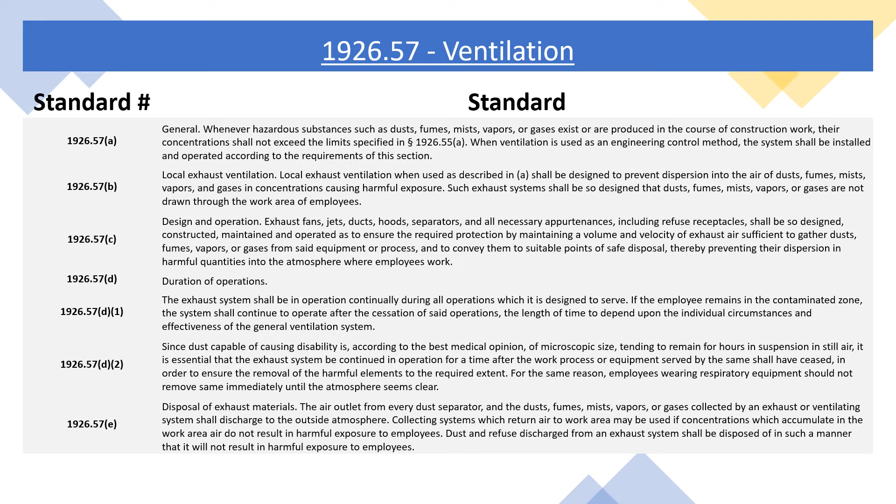Collecting systems which return air to the work area may be used if concentrations which accumulate in the work area air do not result in harmful exposure to employees. Dust and refuse discharged from an exhaust system shall be disposed of in such a manner that it will not result in harmful exposure to employees.

1926.57(f) Abrasive blasting. 1926.57(f)(1) Definitions applicable to this paragraph. Abrasive: a solid substance used in an abrasive blasting operation.

1926.57(f)(1)(2) Abrasive blasting respirator: a respirator constructed so that it covers the wearer's head, neck, and shoulders to protect the wearer from rebounding abrasive.

1926.57(f)(1)(3) Blast cleaning barrel: a complete enclosure which rotates on an axis, or which has an internal moving tread to tumble the parts, in order to expose various surfaces of the parts to the action of an automatic blast spray.

1926.57(f)(1)(4) Blast cleaning room: a complete enclosure in which blasting operations are performed and where the operator works inside of the room to operate the blasting nozzle and direct the flow of the abrasive material.

1926.57(f)(1)(5) Blasting cabinet: an enclosure where the operator stands outside and operates the blasting nozzle through an opening or openings in the enclosure.

1926.57(f)(1)(6) Clean air: air of such purity that it will not cause harm or discomfort to an individual if it is inhaled for extended periods of time.

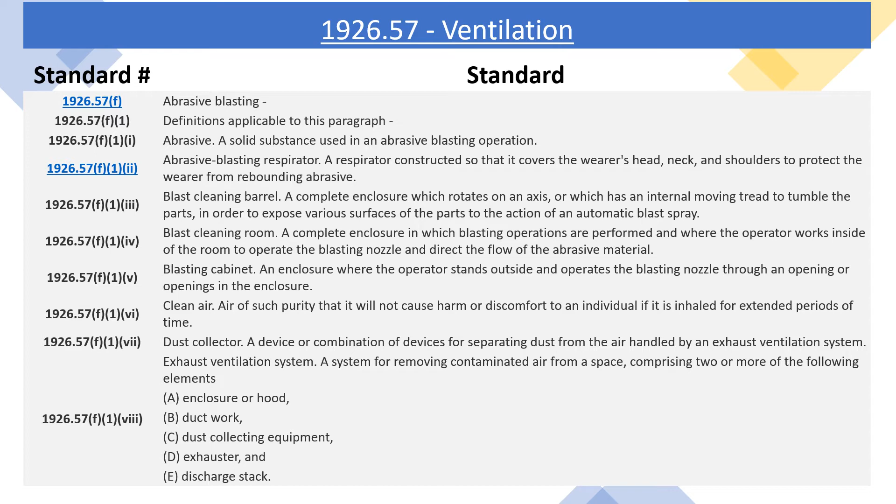1926.57(f)(1)(8) Exhaust ventilation system: a system for removing contaminated air from a space, comprising two or more of the following elements: A. Enclosure or hood, B. Ductwork, C. Dust collecting equipment, D. Exhauster, and E. Discharge stack.

1926.57(f)(1)(9) Particulate filter respirator: an air purifying respirator, commonly referred to as a dust or a fume respirator, which removes most of the dust or fume from the air passing through the device.

1926.57(f)(1)(10) Respirable dust: airborne dust in sizes capable of passing through the upper respiratory system to reach the lower lung passages.

1926.57(f)(1)(11) Rotary blast cleaning table: an enclosure where the pieces to be cleaned are positioned on a rotating table and are passed automatically through a series of blast sprays.

1926.57(f)(1)(12) Abrasive blasting: the forcible application of an abrasive to a surface by pneumatic pressure, hydraulic pressure, or centrifugal force.

1926.57(f)(2) Dust hazards from abrasive blasting.

1926.57 F2.1: Abrasives and the surface coatings on the materials blasted are shattered and pulverized during blasting operations, and the dust formed will contain particles of respirable size. The composition and toxicity of the dust from these sources shall be considered in making an evaluation of the potential health hazards.

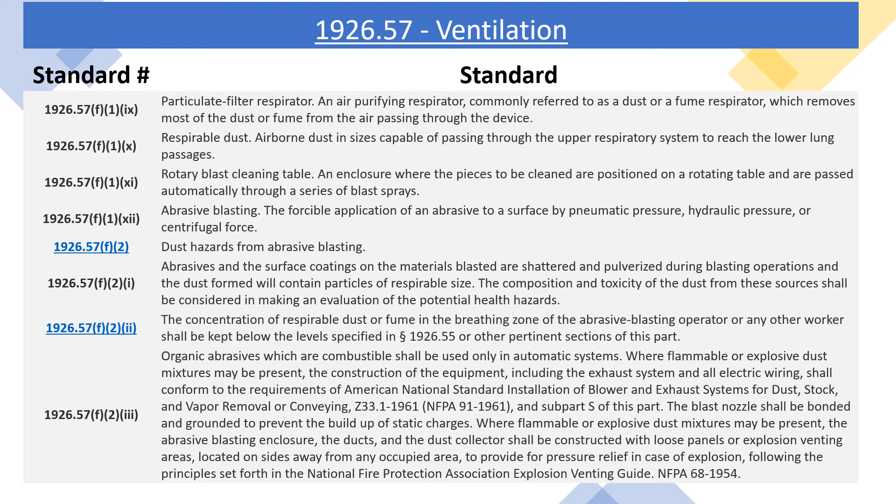The blast nozzle shall be bonded and grounded to prevent the buildup of static charges. Where flammable or explosive dust mixtures may be present, the abrasive blasting enclosure, the ducts, and the dust collector shall be constructed with loose panels or explosion venting areas, located on sides away from any occupied area, to provide for pressure relief in case of explosion, following the principles set forth in the National Fire Protection Association Explosion Venting Guide, NFPA 68-1954.

1926.57 F3: Blast cleaning enclosures. 1926.57 F3.1: Blast cleaning enclosures shall be exhaust ventilated in such a way that a continuous inward flow of air will be maintained at all openings in the enclosure during the blasting operation.

1926.57 F3.1.A: All air inlets and access openings shall be baffled or so arranged that by the combination of inward airflow and baffling, the escape of abrasive or dust particles into an adjacent work area will be minimized and visible spurts of dust will not be observed.

1926.57 F3.1.B: The rate of exhaust shall be sufficient to provide prompt clearance of the dust-laden air within the enclosure after the cessation of blasting.

1926.57 F3.1.C: Before the enclosure is opened, the blast shall be turned off and the exhaust system shall be run for a sufficient period of time to remove the dusty air within the enclosure.

1926.57 F3.1.D: Safety glass protected by screening shall be used in observation windows, where hard deep-cutting abrasives are used.

1926.57 F3.1.E: Slit abrasive resistant baffles shall be installed in multiple sets at all small access openings where dust might escape, and shall be inspected regularly, and replaced when needed.

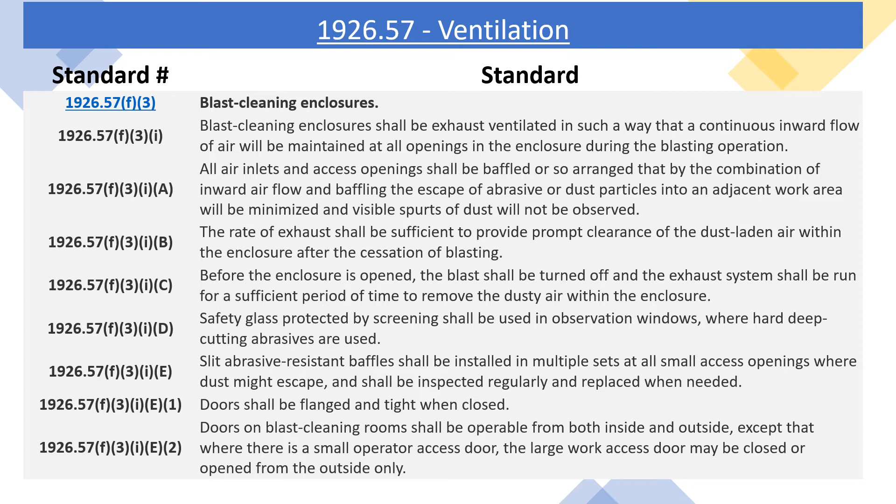1926.57 F3.1.E.2: Doors on blast cleaning rooms shall be operable from both inside and outside, except that where there is a small operator access door, the large work access door may be closed or open from the outside only.

1926.57 F4: Exhaust ventilation systems. 1926.57 F4.1: The construction, installation, inspection, and maintenance of exhaust systems shall conform to the principles and requirements set forth in American National Standard Fundamentals Governing the Design and Operation of Local Exhaust Systems, Z9.2-1960, and ANSI Z33.1-1961.

1926.57 F4.1.A: When dust leaks are noted, repairs shall be made as soon as possible. 1926.57 F4.1.B: The static pressure drop at the exhaust ducts leading from the equipment shall be checked when the installation is completed,

and periodically thereafter to assure continued satisfactory operation. Whenever an appreciable change in the pressure drop indicates a partial blockage, the system shall be cleaned and returned to normal operating condition.

1926.57 F4.2: In installations where the abrasive is recirculated, the exhaust ventilation system for the blasting enclosure shall not be relied upon for the removal of fines from the spent abrasive instead of an abrasive separator. An abrasive separator shall be provided for the purpose.

1926.57 F4.3: The air exhausted from blast cleaning equipment shall be discharged through dust collecting equipment. Dust collectors shall be set up so that the accumulated dust can be emptied and removed without contaminating other working areas.

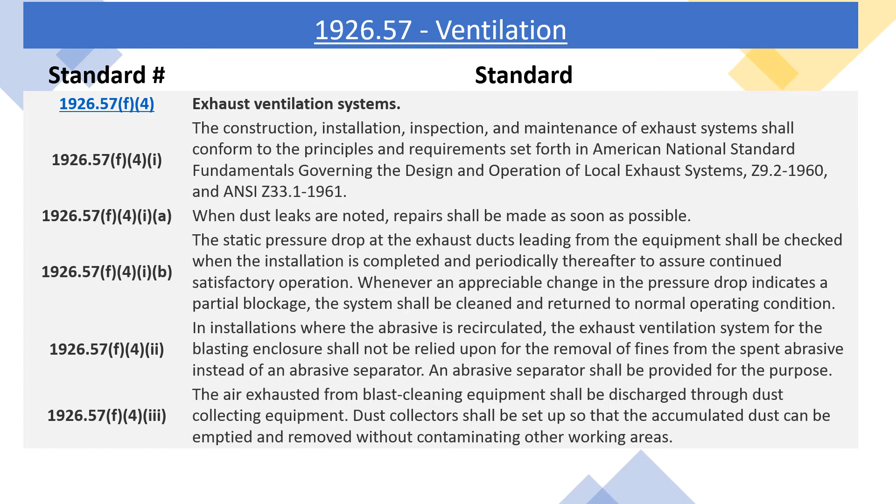1926.57 F5: Personal protective equipment. 1926.57 F5.1: Employers must use only respirators approved by NIOSH under 42 CFR Part 84 for protecting employees from dusts produced during abrasive blasting operations.

1926.57 F5.2: Abrasive blasting respirators shall be worn by all abrasive blasting operators. 1926.57 F5.2.A: When working inside of blast cleaning rooms, or 1926.57 F5.2.B: When using silica sand in manual blasting operations where the nozzle and blast are not physically separated from the operator in an exhaust ventilated enclosure, or

1926.57 F5.2.C: Where concentrations of toxic dust dispersed by the abrasive blasting may exceed the limit set in section 1926.55, or other pertinent sections of this part, and the nozzle and blast are not physically separated from the operator in an exhaust ventilated enclosure.

1926.57 F5.3: Properly fitted particulate filter respirators, commonly referred to as dust filter respirators, may be used for short, intermittent, or occasional dust exposures such as cleanup, dumping of dust collectors, or unloading shipments of sand at a receiving point when it is not feasible to control the dust by enclosure, exhaust ventilation, or other means. The respirators used must be approved by NIOSH under 42 CFR Part 84 for protection against the specific type of dust encountered.

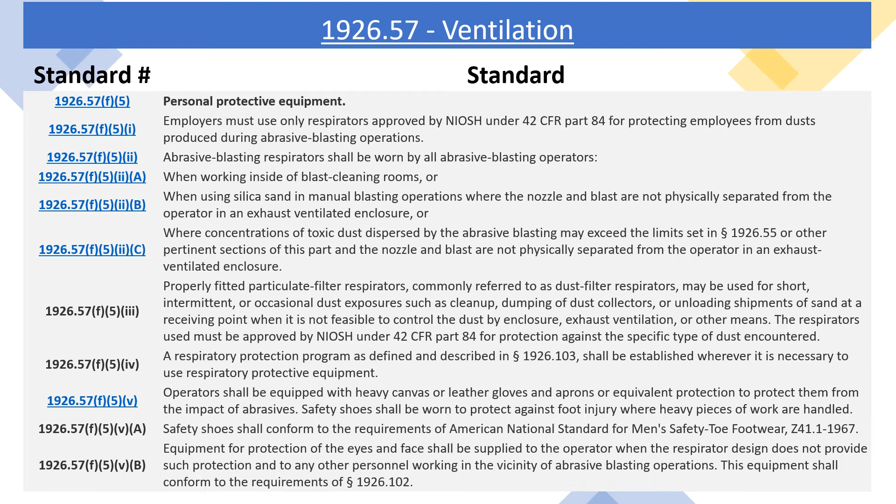1926.57 F5.V.B: Equipment for protection of the eyes and face shall be supplied to the operator when the respirator design does not provide such protection, and to any other personnel working in the vicinity of abrasive blasting operations. This equipment shall conform to the requirements of Section 1926.102.

1926.57 F6: Air supply and air compressors. Air for abrasive blasting respirators must be free of harmful quantities of dusts, mists, or noxious gases, and must meet the requirements for supplied air quality and use specified in 29 CFR 1910.134(i).

1926.57 F7: Operational Procedures and General Safety. Dust shall not be permitted to accumulate on the floor or on ledges outside of an abrasive blasting enclosure, and dust spills shall be cleaned up promptly. Aisles and walkways shall be kept clear of steel shot or similar abrasive which may create a slipping hazard.

1926.57 F8: Scope. This paragraph applies to all operations where an abrasive is forcibly applied to a surface by pneumatic or hydraulic pressure, or by centrifugal force. It does not apply to steam blasting, or steam cleaning, or hydraulic cleaning methods where work is done without the aid of abrasives.

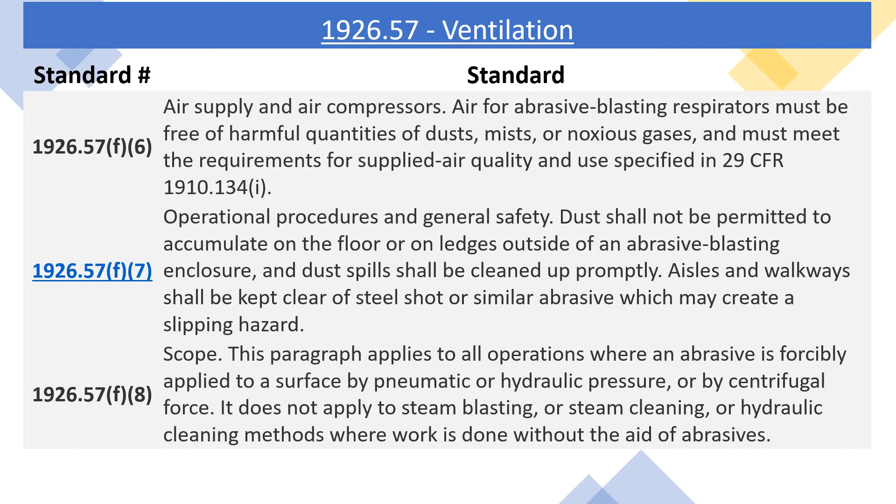1926.57 G: Grinding, polishing, and buffing operations. 1926.57 G1: Definitions applicable to this paragraph.

1926.57 G1.I: Abrasive cutting off wheels. Organic bonded wheels, the thickness of which is not more than 1/48 of their diameter for those up to and including 20 inches (50.8 centimeters) in diameter, and not more than 1/60 of their diameter for those larger than 20 inches (50.8 centimeters) in diameter, used for a multitude of operations variously known as cutting, cutting off, grooving, slotting, coping, and jointing, and the like. The wheels may be solid, consisting of organic bonded abrasive material throughout; steel-centered, consisting of a steel disc with a rim of organic bonded material molded around the periphery; or of the inserted tooth type, consisting of a steel disc with organic bonded abrasive teeth or inserts mechanically secured around the periphery.

1926.57 G1.2: Belts. All power-driven, flexible, coated bands used for grinding, polishing, or buffing purposes.

1926.57 G1.3: Branch pipe. The part of an exhaust system piping that is connected directly to the hood or enclosure.

1926.57 G1.4: Cradle. A movable fixture, upon which the part to be ground or polished is placed.

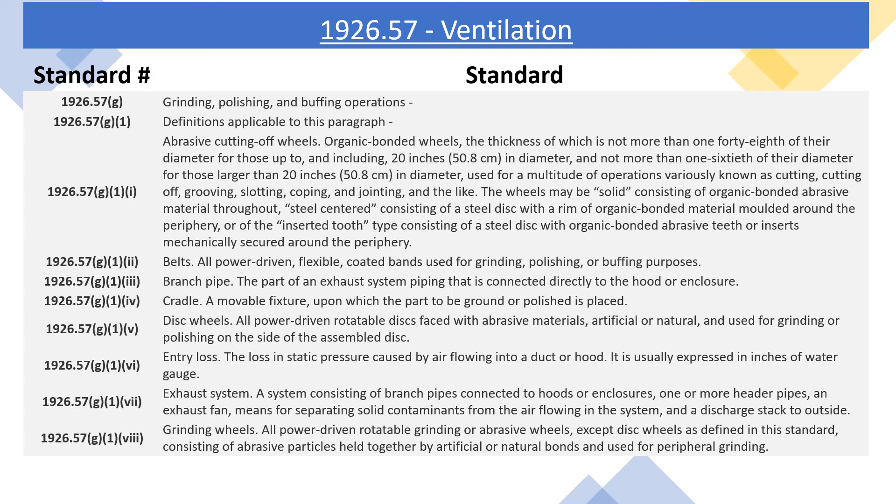1926.57 G1.9: Header pipe, main pipe. A pipe into which one or more branch pipes enter, and which connects such branch pipes to the remainder of the exhaust system.

1926.57 G1.X: Hoods and enclosures. The partial or complete enclosure around the wheel or disc through which air enters an exhaust system during operation.

1926.57 G1.11: Horizontal double spindle disc grinder. A grinding machine carrying two power-driven, rotatable, coaxial, horizontal spindles upon the inside ends of which are mounted abrasive disc wheels used for grinding two surfaces simultaneously.

1926.57 G1.12: Horizontal single spindle disc grinder. A grinding machine carrying an abrasive disc wheel upon one or both ends of a power-driven, rotatable single horizontal spindle.

1926.57 G1.13: Polishing and buffing wheels. All power-driven rotatable wheels composed all or in part of textile fabrics, wood, felt, leather, paper, and may be coated with abrasives on the periphery of the wheel for purposes of polishing, buffing, and light grinding.

1926.57 G114, Portable grinder: any power-driven rotatable grinding, polishing, or buffing wheel mounted in such manner that it may be manually manipulated.

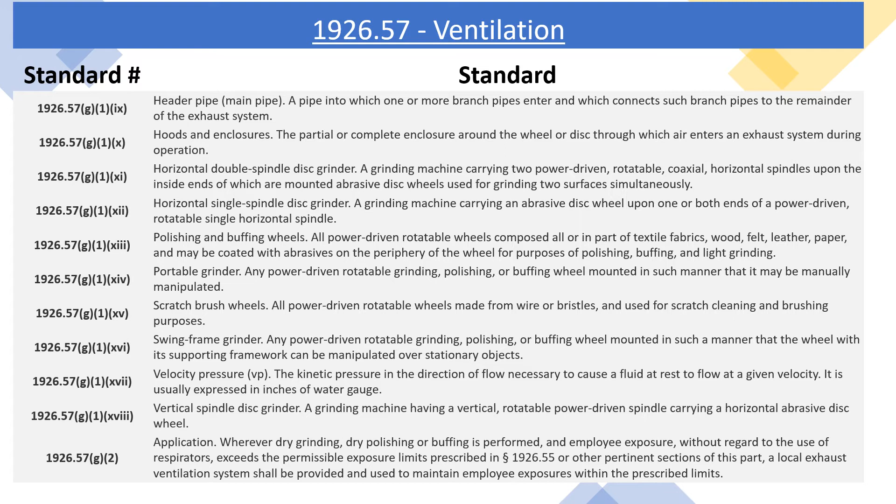1926.57 G2, Application: wherever dry grinding, dry polishing, or buffing is performed, and employee exposure, without regard to the use of respirators, exceeds the permissible exposure limits prescribed in Section 1926.55 or other pertinent sections of this part, a local exhaust ventilation system shall be provided and used to maintain employee exposures within the prescribed limits.

1926.57 G3, Hood and branch pipe requirements. G3I: Hoods connected to exhaust systems shall be used, and such hoods shall be designed, located, and placed so that the dust or dirt particles shall fall or be projected into the hoods in the direction of the airflow. No wheels, discs, straps, or belts shall be operated in such manner, and in such direction as to cause the dust and dirt particles to be thrown into the operator's breathing zone.

1926.57 G3-2: Grinding wheels on floor stands, pedestals, benches, and special-purpose grinding machines and abrasive cutting-off wheels shall have not less than the minimum exhaust volumes shown in Table D 57.1, with a recommended minimum duct velocity of 4,500 feet per minute in the branch and 3,500 feet per minute in the main.

The entry losses from all hoods except the vertical spindle disc grinder hood shall equal 0.65 velocity pressure for a straight takeoff and 0.45 velocity pressure for a tapered takeoff. The entry loss for the vertical spindle disc grinder hood is shown in Figure D 57.1, following paragraph G of this section.

1926.57 G3-3: Scratch brush wheels and all buffing and polishing wheels mounted on floor stands, pedestals, benches, or special purpose machines shall have not less than the minimum exhaust volume shown in Table D 57.2.

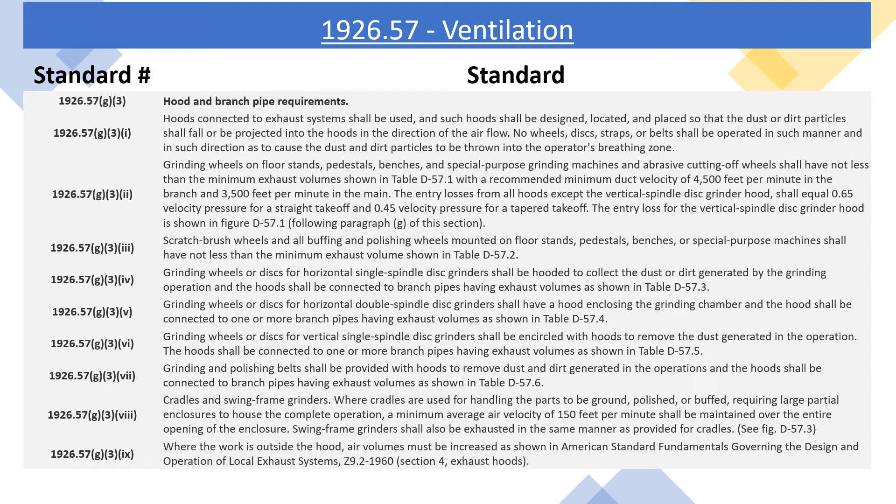1926.57 G3-9: where the work is outside the hood, air volumes must be increased as shown in American Standard Fundamentals Governing the Design and Operation of Local Exhaust Systems, Z9.2-1960, Section 4, Exhaust Hoods.

1926.57 G4, Exhaust Systems. G4I: Exhaust systems for grinding, polishing, and buffing operations should be designed in accordance with American Standard Fundamentals Governing the Design and Operation of Local Exhaust Systems, Z9.2-1960.

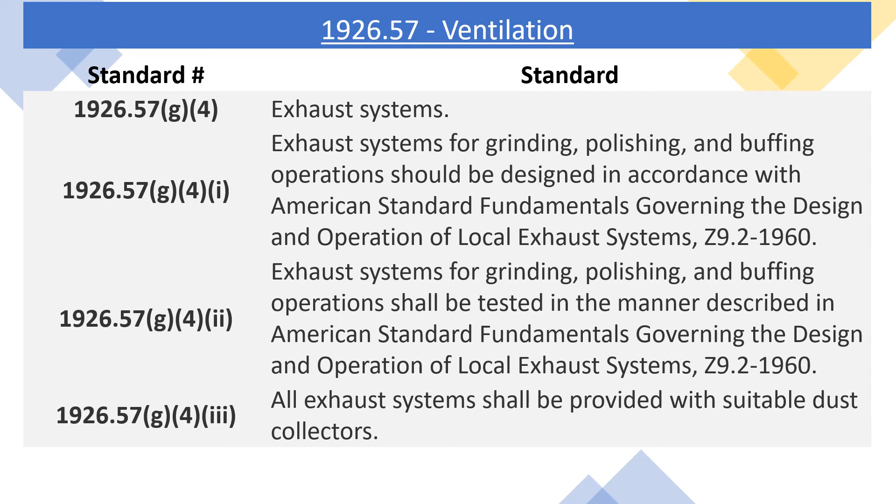1926.57 G4-2: Exhaust systems for grinding, polishing, and buffing operations shall be tested in the manner described in American Standard Fundamentals Governing the Design and Operation of Local Exhaust Systems, Z9.2-1960. G4-3: All exhaust systems shall be provided with suitable dust collectors.

1926.57 G5, Hood and enclosure design. G5I, G5IA: It is the dual function of grinding and abrasive cutting off wheel hoods to protect the operator from the hazards of bursting wheels, as well as to provide a means for the removal of dust and dirt generated.

All hoods shall be not less in structural strength than specified in the American National Standard Safety Code for the use, care, and protection of abrasive wheels, B7.1-1970.

1926.57 G5 I.B. Due to the variety of work and types of grinding machines employed, it is necessary to develop hoods adaptable to the particular machine in question, and such hoods shall be located as close as possible to the operation.

1926.57 G5-2, exhaust hoods for floor stands, pedestals, and bench grinders shall be designed in accordance with Figure D57.2. The adjustable tongue shown in the figure shall be kept in working order and shall be adjusted within 1/4 inch (0.635 centimeters) of the wheel periphery at all times.

1926.57 G5-3, swing frame grinders shall be provided with exhaust booths as indicated in Figure D57.3.

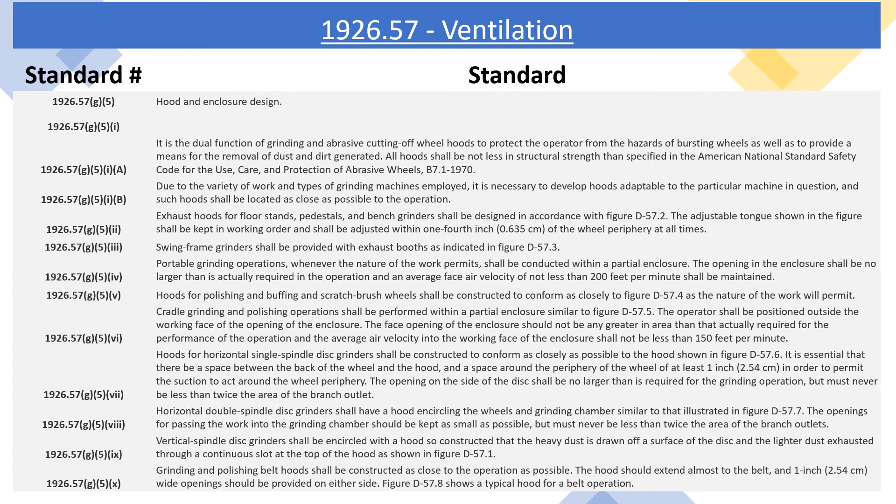1926.57 G6 Scope. This paragraph, G, prescribes the use of exhaust hood enclosures and systems in removing dust, dirt, fumes, and gases generated through the grinding, polishing, or buffing of ferrous and non-ferrous metals.

1926.57 H. Spray finishing operations.

1926.57 H1 Definitions applicable to this paragraph. H1.I. Spray finishing operations are employment of methods wherein organic or inorganic materials are utilized in dispersed form for deposit on surfaces to be coated, treated, or cleaned. Such methods of deposit may involve either automatic, manual, or electrostatic deposition but do not include metal spraying or metallizing, dipping, flow coating, roller coating, tumbling, centrifuging, or spray washing and degreasing as conducted in self-contained washing and degreasing machines or systems.

1926.57 H1.2 Spray booth. Spray booths are defined and described in section 1926.66 A. See sections 103, 104, and 105 of the Standard for Spray Finishing Using Flammable and Combustible Materials, NFPA No. 33-1969.

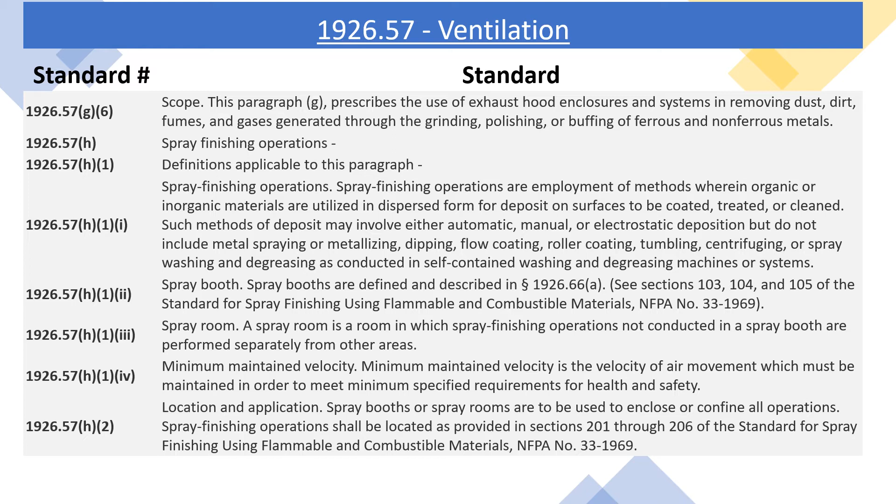1926.57 H3: Design and construction of spray booths. Spray booths shall be designed and constructed in accordance with section 1926.66 B1 through 4 and 6 through 10. See sections 301 to 304 and 306 to 310 of the Standard for Spray Finishing Using Flammable and Combustible Materials, NFPA No. 33-1969, for general construction specifications. For a more detailed discussion of fundamentals relating to this subject, see ANSI Z9.2-1960.

1926.57 H3.1.A: Lights, motors, electrical equipment, and other sources of ignition shall conform to the requirements of section 1926.66 B10 and C. See section 310 and chapter 4 of the Standard for Spray Finishing Using Flammable and Combustible Materials, NFPA No. 33-1969. H3.1.B: In no case shall combustible material be used in the construction of a spray booth and supply or exhaust duct connected to it.

1926.57 H3.2: Unobstructed walkways shall not be less than 6.5 feet (1.976 m) high, and shall be maintained clear of obstruction from any work location in the booth to a booth exit or open booth front. In booths where the open front is the only exit, such exits shall be not less than 3 feet (0.912 m) wide. In booths having multiple exits, such exits shall not be less than 2 feet (0.608 m) wide, provided that the maximum distance from the work location to the exit is 25 feet (7.6 m) or less. Where booth exits are provided with doors, such doors shall open outward from the booth.

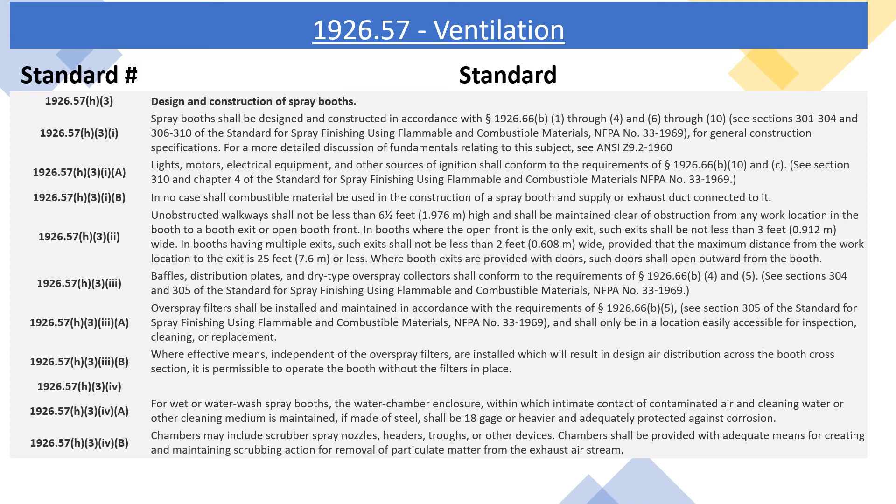1926.57 H3.5: Collecting tanks shall be of welded steel construction, or other suitable non-combustible material. If pits are used as collecting tanks, they shall be concrete, masonry, or other material having similar properties.

1926.57 H3.5a: Tanks shall be provided with weirs, skimmer plates, or screens to prevent sludge and floating paint from entering the pump suction box. Means for automatically maintaining the proper water level shall also be provided. Fresh water inlets shall not be submerged. They shall terminate at least one pipe diameter above the safety overflow level of the tank.

1926.57 H3.5b: Tanks shall be so constructed as to discourage accumulation of hazardous deposits. H3.6: Pump manifolds, risers, and headers shall be adequately sized to ensure sufficient water flow to provide efficient operation of the water chamber.

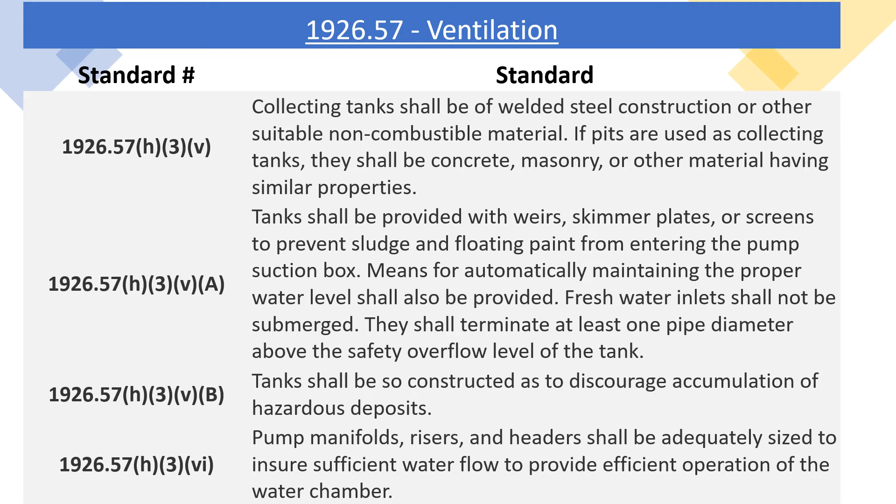1926.57 H4: Design and construction of spray rooms. H4.1: Spray rooms, including floors, shall be constructed of masonry, concrete, or other non-combustible material. H4.2: Spray rooms shall have non-combustible fire doors and shutters. H4.3: Spray rooms shall be adequately ventilated so that the atmosphere in the breathing zone of the operator shall be maintained in accordance with the requirements of paragraph H6.2 of this section. H4.4: Spray rooms used for production spray finishing operations shall conform to the requirements for spray booths.

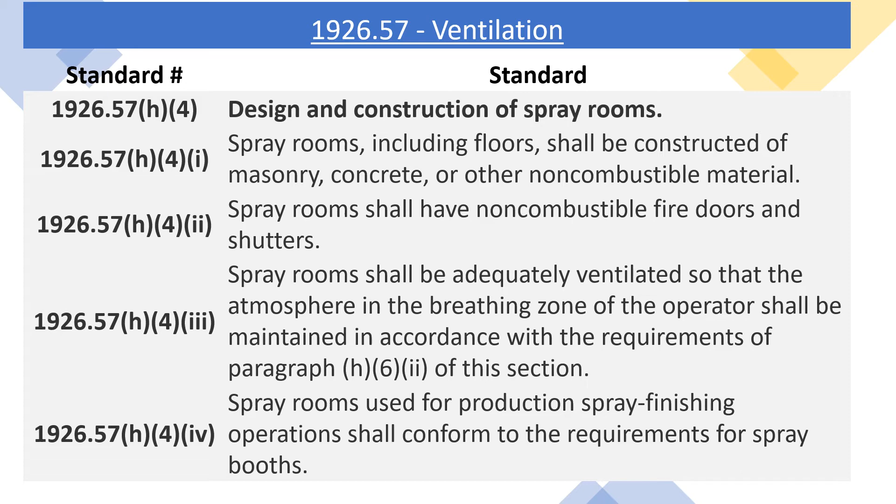1926.57 H5: Ventilation. H5.1: Ventilation shall be provided in accordance with provisions of Section 1926.66 D. See Chapter 5 of the Standard for Spray Finishing Using Flammable or Combustible Materials, NFPA No. 33-1969, and in accordance with the following.

1926.57 H5.1.A: Where a fan plenum is used to equalize or control the distribution of exhaust air movement through the booth, it shall be of sufficient strength or rigidity to withstand the differential air pressure or other superficially imposed loads for which the equipment is designed, and also to facilitate cleaning. Construction specifications shall be at least equivalent to those of paragraph H5.3 of this section.

1926.57 H5.1.B: Reserved. H5.2: Inlet or supply ductwork used to transport makeup air to spray booths or surrounding areas shall be constructed of non-combustible materials.

1926.57 H.5.2a. If negative pressure exists within inlet ductwork, all seams and joints shall be sealed if there is a possibility of infiltration of harmful quantities of noxious gases, fumes, or mists from areas through which ductwork passes.

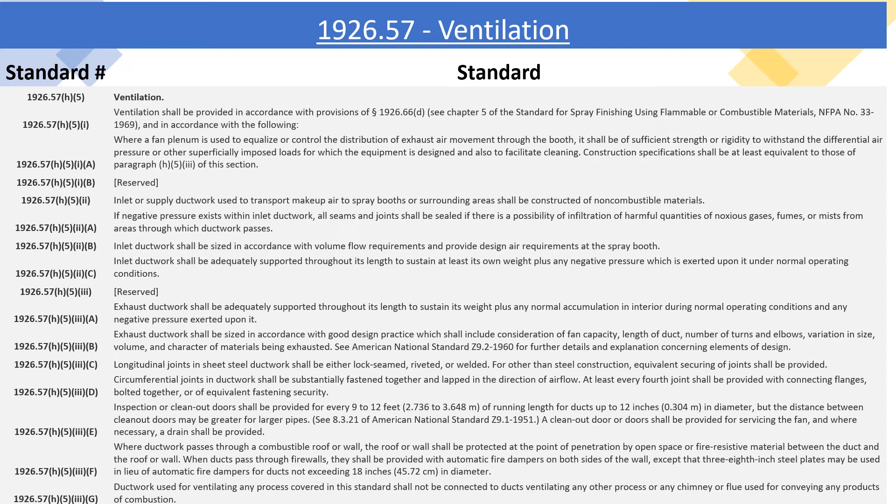1926.57 H.5.3g. Ductwork used for ventilating any process covered in this standard shall not be connected to ducts ventilating any other process or any chimney or flue used for conveying any products of combustion.

1926.57 H.6. Velocity and airflow requirements. H.6i. Except where a spray booth has an adequate air replacement system, the velocity of air into all openings of a spray booth shall be not less than that specified in Table D 57.7, for the operating conditions specified. An adequate air replacement system is one which introduces replacement air upstream or above the object being sprayed and is so designed that the velocity of air in the booth cross-section is not less than that specified in Table D 57.7, when measured upstream or above the object being sprayed.

1926.57 H.6.2. In addition to the requirements in paragraph H.6i of this section, the total air volume exhausted through a spray booth shall be such as to dilute solvent vapor to at least 25% of the lower explosive limit of the solvent being sprayed.

An example of the method of calculating this volume is given below. To determine the lower explosive limits of the most common solvents used in spray finishing, see Table D 57.8. Column 1 gives the number of cubic feet of vapor per gallon of solvent and column 2 gives the lower explosive limit, LEL, in percentage by volume of air. Note that the quantity of solvent will be diminished by the quantity of solids and non-flammables contained in the finish.

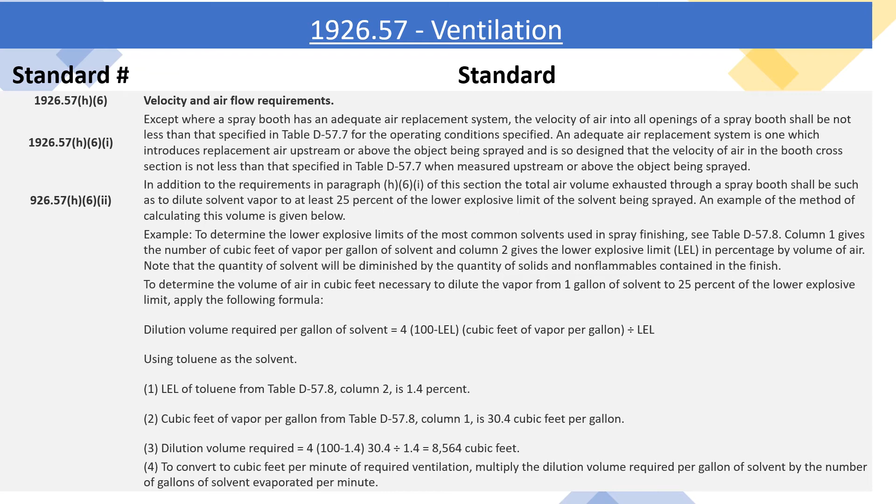4. To convert to cubic feet per minute of required ventilation, multiply the dilution volume required per gallon of solvent by the number of gallons of solvent evaporated per minute.

1926.57 H6 3a. When an operator is in a booth downstream of the object being sprayed, an air-supplied respirator or other type of respirator approved by NIOSH under 42 CFR Part 84 for the material being sprayed should be used by the operator. H6 3b. Where downdraft booths are provided with doors, such doors shall be closed when spray painting.

1926.57 H7, makeup air. H7-1: Clean fresh air, free of contamination from adjacent industrial exhaust systems, chimneys, stacks, or vents, shall be supplied to a spray booth or room in quantities equal to the volume of air exhausted through the spray booth.

1926.57 H7-2: Where a spray booth or room receives makeup air through self-closing doors, dampers, or louvers, they shall be fully open at all times when the booth or room is in use for spraying. The velocity of air through such doors, dampers, or louvers shall not exceed 200 feet per minute. If the fan characteristics are such that the required airflow through the booth will be provided, higher velocities through the doors, dampers, or louvers may be used.

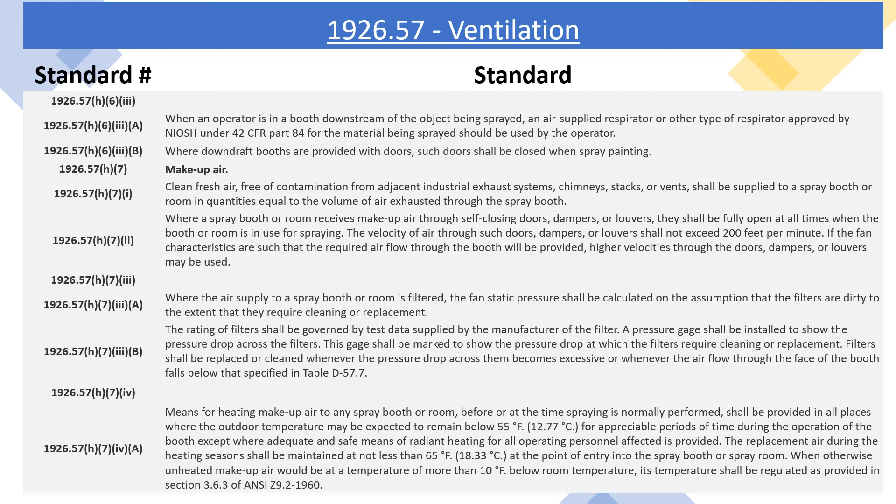The replacement air during the heating seasons shall be maintained at not less than 65 degrees Fahrenheit (18.33 degrees Celsius) at the point of entry into the spray booth or spray room. When otherwise unheated makeup air would be at a temperature of more than 10 degrees Fahrenheit below room temperature, its temperature shall be regulated as provided in Section 3.6.3 of ANSI Z9.2-1960.

1926.57 H7-4b. As an alternative to an air replacement system complying with the preceding section, general heating of the building in which the spray room or booth is located may be employed, provided that all occupied parts of the building are maintained at not less than 65 degrees Fahrenheit (18.33 degrees Celsius) when the exhaust system is in operation, or the general heating system supplemented by other sources of heat may be employed to meet this requirement.

1926.57 H7-4c. No means of heating makeup air shall be located in a spray booth.

1926.57 H7-4d. Where makeup air is heated by coal or oil, the products of combustion shall not be allowed to mix with the makeup air, and the products of combustion shall be conducted outside the building through a flue terminating at a point remote from all points where makeup air enters the building.

1926.57 H7-4e. Where makeup air is heated by gas, and the products of combustion are not mixed with the makeup air but are conducted through an independent flue to a point outside the building remote from all points where makeup air enters the building, it is not necessary to comply with paragraph H7-4f of this section.

1926.57 H7-4f. Where makeup air to any manually operated spray booth or room is heated by gas, and the products of combustion are allowed to mix with the supply air, the following precautions must be taken. H7-4f-1: The gas must have a distinctive and strong enough odor to warn workmen in a spray booth or room of its presence if in an unburned state in the makeup air.

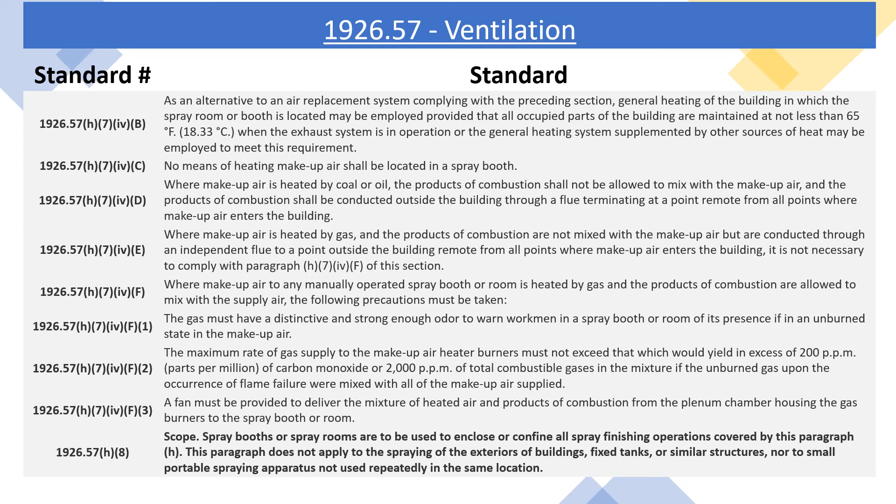1926.57 I. Open surface tanks. 1926.57 I1 General.

1926.57 I1.1. This paragraph applies to all operations involving the immersion of materials in liquids, or in the vapors of such liquids, for the purpose of cleaning or altering the surface or adding to or imparting a finish thereto or changing the character of the materials.

and their subsequent removal from the liquid or vapor, draining, and drying.

These operations include washing, electroplating, anodizing, pickling, quenching, dyeing, dipping, tanning, dressing, bleaching, degreasing, alkaline cleaning, stripping, rinsing, digesting, and other similar operations.

1926.57 I1.2. Except where specific construction specifications are prescribed in this section, hoods, ducts, elbows, fans, blowers, and all other exhaust system parts, components, and supports thereof shall be so constructed as to meet conditions of service, and to facilitate maintenance.

and shall conform in construction to the specifications contained in American National Standard Fundamentals Governing the Design and Operation of Local Exhaust Systems, Z9.2-1960.

1926.57 I2. Classification of open surface tank operations. 1926.57 I2.1. Open surface tank operations shall be classified into 16 classes, numbered A1 to D4, inclusive.

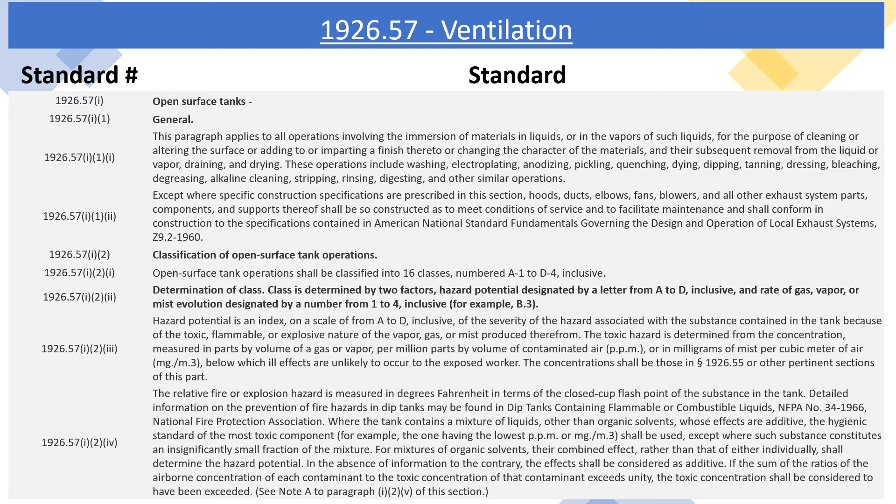See Note A to paragraph I-2v of this section. 1926.57 I-2v. Hazard potential shall be determined from Table D 57.9, with the value indicating greater hazard being used.

When the hazardous material may be either a vapor with a threshold limit value, TLV, in ppm, or a mist with a TLV in mg/m3, the TLV indicating the greater hazard shall be used. For example, A takes precedence over B or C, B over C, C over D.

1926.57 I-2-6. Rate of gas, vapor, or mist evolution is a numerical index, on a scale of from 1 to 4, inclusive, both of the relative capacity of the tank to produce gas, vapor, or mist and of the relative energy with which it is projected or carried upwards from the tank.

Rate is evaluated in terms of 1926.57 I-2-6 A, the temperature of the liquid in the tank in degrees Fahrenheit; 1926.57 I-2-6 B, the number of degrees Fahrenheit that this temperature is below the boiling point of the liquid in degrees Fahrenheit.

1926.57 I-2-6 C, the relative evaporation of the liquid in still air at room temperature in an arbitrary scale: fast, medium, slow, or nil.

and 1926.57 I-2-6 D, the extent that the tank gases or produces mist in an arbitrary scale: high, medium, low, and nil. See Table D 57.10, Note 2.

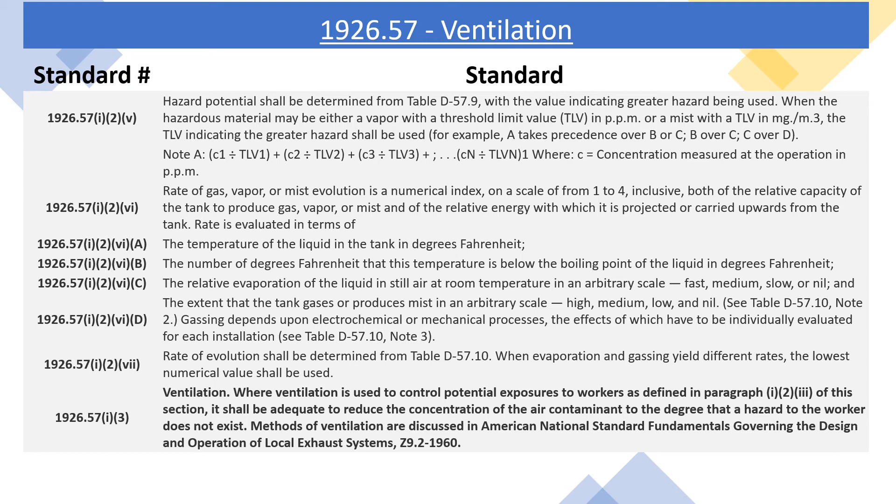1926.57 I-3: Ventilation. Where ventilation is used to control potential exposures to workers as defined in paragraph I-2-3 of this section, it shall be adequate to reduce the concentration of the air contaminant to the degree that a hazard to the worker does not exist. Methods of ventilation are discussed in American National Standard Fundamentals Governing the Design and Operation of Local Exhaust Systems, Z9.2-1960.

1926.57 I-4: Control Requirements. I-4-1: Control velocities shall conform to Table D 57.11, in all cases where the flow of air past the breathing or working zone of the operator and into the hoods is undisturbed by local environmental conditions, such as open windows, wall fans, unit heaters, or moving machinery.

1926.57 I-4-2: All tanks exhausted by means of hoods which: A) project over the entire tank; B) are fixed in position in such a location that the head of the workman, in all his normal operating positions while working at the tank, is in front of all hood openings; and C) are completely enclosed on at least two sides, shall be considered to be exhausted through an enclosing hood.

1926.57 I-4-2-D: The quantity of air in cubic feet per minute necessary to be exhausted through an enclosing hood shall be not less than the product of the control velocity times the net area of all openings in the enclosure through which air can flow into the hood.

1926.57 I-4-3: All tanks exhausted by means of hoods which do not project over the entire tank, and in which the direction of air movement into the hood or hoods is substantially horizontal, shall be considered to be laterally exhausted.

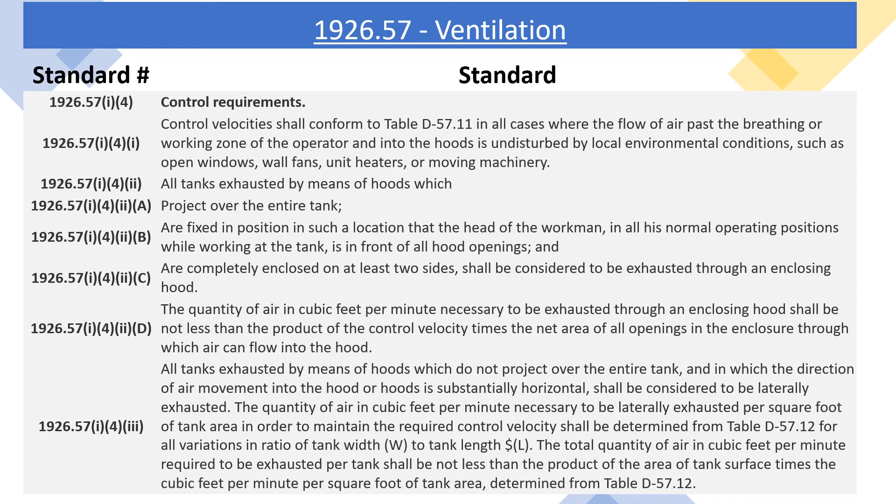The quantity of air in cubic feet per minute necessary to be laterally exhausted per square foot of tank area in order to maintain the required control velocity shall be determined from Table D 57.12 for all variations in ratio of tank width, W, to tank length, L. The total quantity of air in cubic feet per minute required to be exhausted per tank shall be not less than the product of the area of tank surface times the cubic feet per minute per square foot of tank area, determined from Table D 57.12.

1926.57 I-4-3a: For lateral exhaust hoods over 42 inches (1.06 meters) wide, or where it is desirable to reduce the amount of air removed from the workroom, air supply slots or orifices shall be provided along the side or the center of the tank opposite from the exhaust slots. The design of such systems shall meet the following criteria.

1926.57 I-4-3a-1: The supply air volume plus the entrained air shall not exceed 50% of the exhaust volume.

1926.57 I-4-3a-2: The velocity of the supply airstream as it reaches the effective control area of the exhaust slot shall be less than the effective velocity over the exhaust slot area.

1926.57 I-4-3a-3: The vertical height of the receiving exhaust hood, including any baffle, shall not be less than 1/4 the width of the tank.

1926.57 I-4-3a-4: The supply airstream shall not be allowed to impinge on obstructions between it and the exhaust slot in such a manner as to significantly interfere with the performance of the exhaust hood.

1926.57 I-4-3a-5: Since most failure of push-pull systems result from excessive supply air volumes and pressures, methods of measuring and adjusting the supply air shall be provided. When satisfactory control has been achieved, the adjustable features of the hood shall be fixed so that they will not be altered.

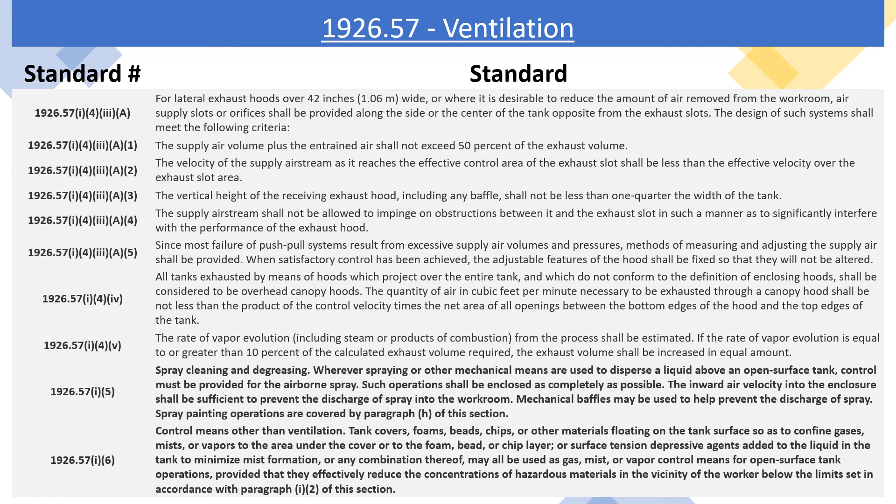1926.57 I.7 System design. 1926.57 I.7.1. The equipment for exhausting air shall have sufficient capacity to produce the flow of air required in each of the hoods and openings of the system. 1926.57 I.7.2. The capacity required in paragraph I.7.1 of this section shall be obtained when the airflow producing equipment is operating against the following pressure losses, the sum of which is the static pressure.

1926.57 I-7, 2a, entrance losses into the hood. 1926.57 I-7, 2b, resistance to airflow in branch pipe including bends and transformations. 1926.57 I-7, 2c, entrance loss into the main pipe. 1926.57 I-7, 2d, resistance to airflow in main pipe including bends and transformations. 1926.57 I-7, 2e, resistance of mechanical equipment, that is, filters, washers, condensers, absorbers, etc., plus their entrance and exit losses. 1926.57 I-7, 2f, resistance in outlet duct and discharge stack.

1926.57 I-7, 3, two or more operations shall not be connected to the same exhaust system where either one or the combination of the substances removed may constitute a fire, explosion, or chemical reaction hazard in the duct system. Traps or other devices shall be provided to ensure that condensate in ducts does not drain back into any tank.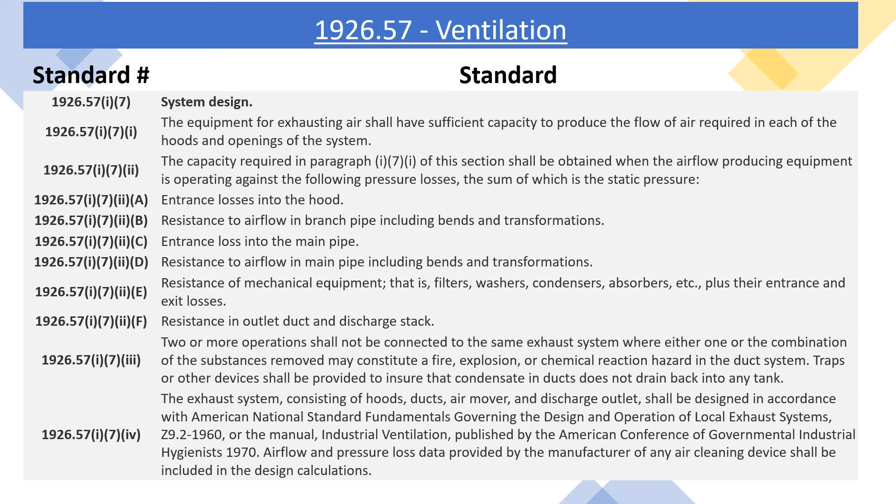1926.57 I-7, 4, the exhaust system, consisting of hoods, ducts, air mover, and discharge outlet, shall be designed in accordance with American National Standard Fundamentals Governing the Design and Operation of Local Exhaust Systems, Z9.2-1960, or the Manual, Industrial Ventilation, published by the American Conference of Governmental Industrial Hygienists 1970. Airflow and pressure loss data provided by the manufacturer of any air cleaning device shall be included in the design calculations.

1926.57 I-8, Operation. 1926.57 I-8.1, the required airflow shall be maintained at all times during which gas, mist, or vapor is emitted from the tank, and at all times the tank, the draining, or the drying area is in operation or use. When the system is first installed, the airflow from each hood shall be measured by means of a pitot traverse in the exhaust duct and corrective action taken if the flow is less than that required. When the proper flow is obtained, the hood static pressure shall be measured and recorded.

At intervals of not more than 3 months operation, or after a prolonged shutdown period, the hoods and duct system shall be inspected for evidence of corrosion or damage. In any case where the airflow is found to be less than required, it shall be increased to the required value. Information on airflow and static pressure measurement and calculations may be found in American National Standard Fundamental Governing the Design and Operation of Local Exhaust Systems, Z9.2-1960, or in the Manual, Industrial Ventilation, published by the American Conference of Governmental Industrial Hygienists.

1926.57 I-8, 2, the exhaust system shall discharge to the outer air in such a manner that the possibility of its effluent entering any building is at a minimum. Recirculation shall only be through a device for contaminant removal which will prevent the creation of a health hazard in the room or area to which the air is recirculated.

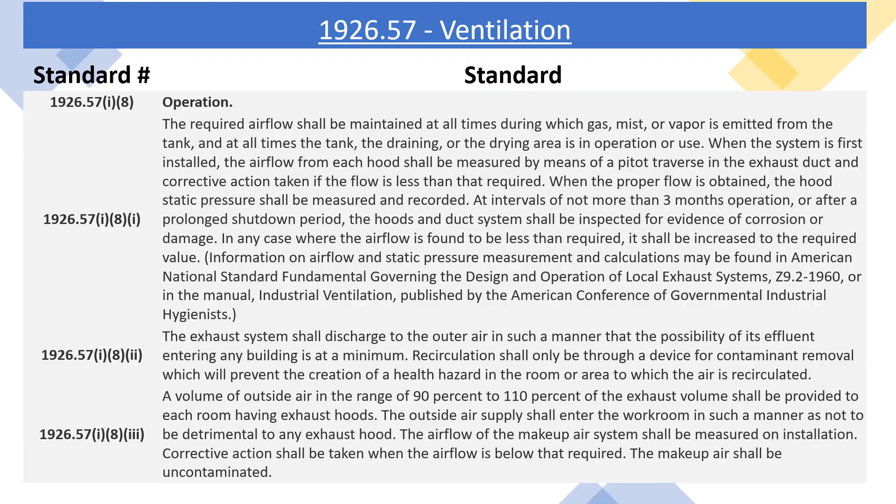1926.57 I-9, Personal Protection. 1926.57 I-9.1, all employees working in and around open surface tank operations must be instructed as to the hazards of their respective jobs, and in the personal protection and first aid procedures applicable to these hazards.

1926.57 I-9-2: All persons required to work in such a manner that their feet may become wet shall be provided with rubber or other impervious boots or shoes, rubbers, or wooden-soled shoes sufficient to keep feet dry.

1926.57 I-9-3: All persons required to handle work wet with a liquid other than water shall be provided with gloves impervious to such liquid and of a length sufficient to prevent entrance of liquid into the tops of the gloves. The interior of gloves shall be kept free from corrosive or irritating contaminants.

1926.57 I-9-4: All persons required to work in such a manner that their clothing may become wet shall be provided with such aprons, coats, jackets, sleeves, or other garments made of rubber or other materials impervious to liquids other than water, as are required to keep their clothing dry. Aprons shall extend well below the top of boots to prevent liquid splashing into the boots.

Provision of dry, clean cotton clothing along with rubber shoes or short boots and an apron impervious to liquids other than water shall be considered a satisfactory substitute where small parts are cleaned, plated, or acid dipped in open tanks and rapid work is required.

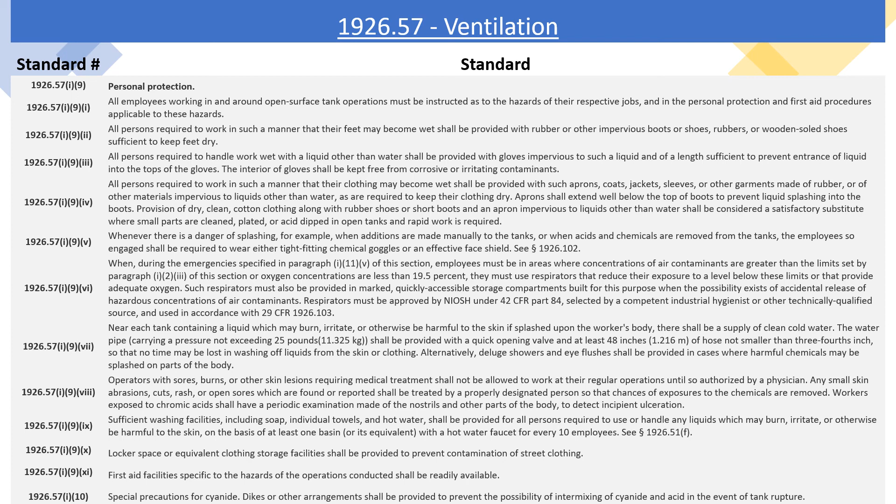1926.57 I-11: Inspection, maintenance, and installation. Floors and platforms around tanks shall be prevented from becoming slippery both by original type of construction and by frequent flushing. They shall be firm, sound, and of the design and construction to minimize the possibility of tripping.

1926.57 I-11-2. Before cleaning the interior of any tank, the contents shall be drained off, and the clean-out doors shall be opened where provided. All pockets in tanks or pits, where it is possible for hazardous vapors to collect, shall be ventilated and cleared of such vapors.

1926.57 I-11-3. Tanks which have been drained to permit employees to enter for the purposes of cleaning, inspection, or maintenance may contain atmospheres which are hazardous to life or health, through the presence of flammable or toxic air contaminants, or through the absence of sufficient oxygen. Before employees shall be permitted to enter any such tank, appropriate tests of the atmosphere shall be made to determine if the limits set by paragraph I-2-3 of this section are exceeded, or if the oxygen concentration is less than 19.5%.

1926.57 I-11-4. If the tests made in accordance with paragraph I-11-3 of this section indicate that the atmosphere in the tank is unsafe, before any employee is permitted to enter, the tank shall be ventilated until the hazardous atmosphere is removed, and ventilation shall be continued so as to prevent the occurrence of a hazardous atmosphere as long as an employee is in the tank.

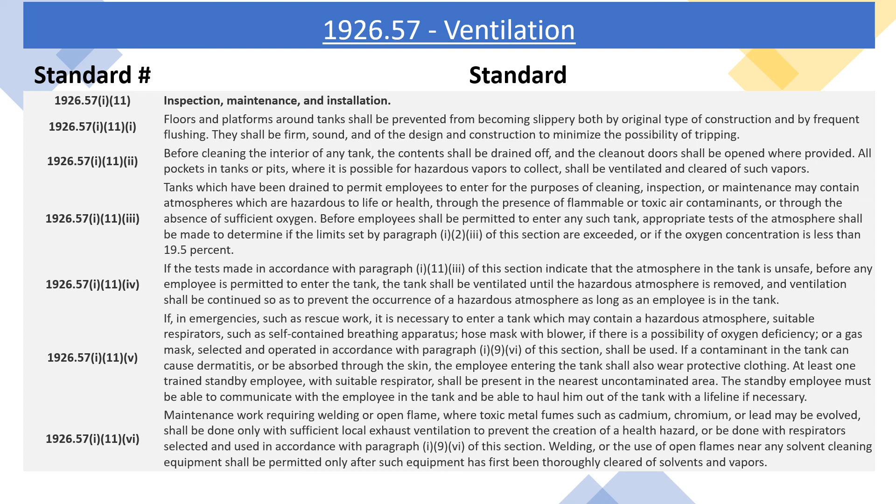1926.57 I-12. Vapor degreasing tanks. In any vapor degreasing tank equipped with a condenser or vapor level thermostat, the condenser or thermostat shall keep the level of vapors below the top edge of the tank by a distance at least equal to 1/2 the tank width, or at least 36 inches (0.912 meters), whichever is shorter.

1926.57 I-12-2. Where gas is used as a fuel for heating vapor degreasing tanks, the combustion chamber shall be of tight construction, except for such openings as the exhaust flue, and those that are necessary for supplying air for combustion. Flues shall be of corrosion-resistant construction and shall extend to the outer air. If mechanical exhaust is used on this flue, a draft diverter shall be used. Special precautions must be taken to prevent solvent fumes from entering the combustion air of this or any other heater when chlorinated or fluorinated hydrocarbon solvents, for example trichloroethylene or Freon, are used.

1926.57 I-12-3. Heating elements shall be so designed and maintained that their surface temperature will not cause the solvent or mixture to decompose, break down, or be converted into an excessive quantity of vapor.

1926.57 I-12-4. Tanks or machines of more than 4 square feet (0.368 square meters) of vapor area, used for solvent cleaning or vapor degreasing, shall be equipped with suitable cleanout or sludge doors located near the bottom of each tank or still. These doors shall be so designed and gasketed that there will be no leakage of solvent when they are closed.

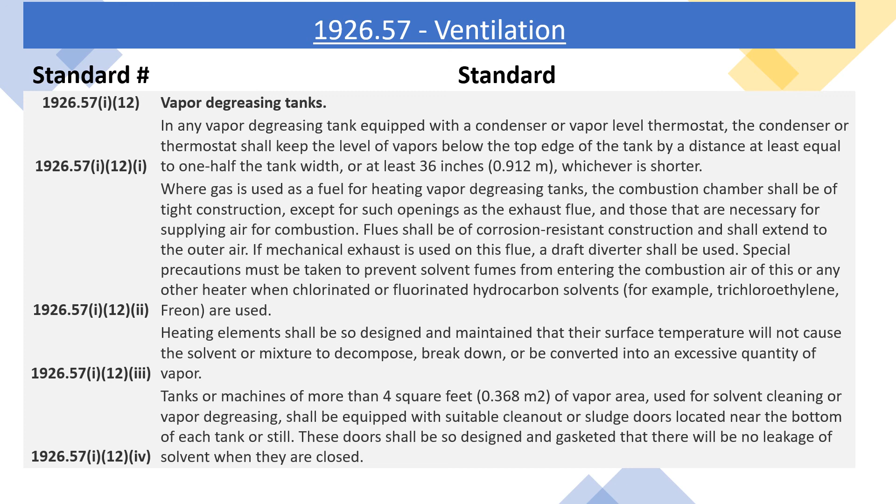1926.57 I-13. Scope. This paragraph, I, applies to all operations involving the immersion of materials in liquids, or in the vapors of such liquids, for the purpose of cleaning or altering their surfaces, or adding or imparting a finish thereto, or changing the character of the materials, and their subsequent removal from the liquids or vapors, draining, and drying. Such operations include washing, electroplating, anodizing, pickling, quenching, dyeing, dipping, tanning, dressing, bleaching, degreasing, alkaline cleaning, stripping, rinsing, digesting, and other similar operations, but do not include molten materials handling operations or surface coating operations.

1926.57 I-13-2. Molten materials handling operations means all operations, other than welding, burning, and soldering operations, involving the use, melting, smelting, or pouring of metals, alloys, salts, or other similar substances in the molten state. Such operations also include heat treating baths, descaling baths, die casting, stereotyping, galvanizing, tinning, and similar operations.

1926.57 I-13-3. Surface coating operations means all operations involving the application of protective, decorative, adhesive, or strengthening coating or impregnation to one or more surfaces, or into the interstices of any object or material, by means of spraying, spreading, flowing, brushing, roll coating, pouring, cementing, or similar means, and any subsequent draining or drying operations, excluding open tank operations.